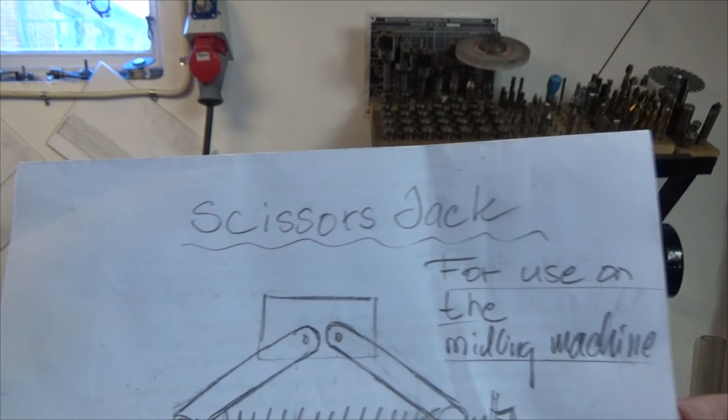Hi there. I got an idea when I made the two machinist jacks in the previous videos, and I thought, why not use a scissors jack for use on the milling machine? And that will be my new project.

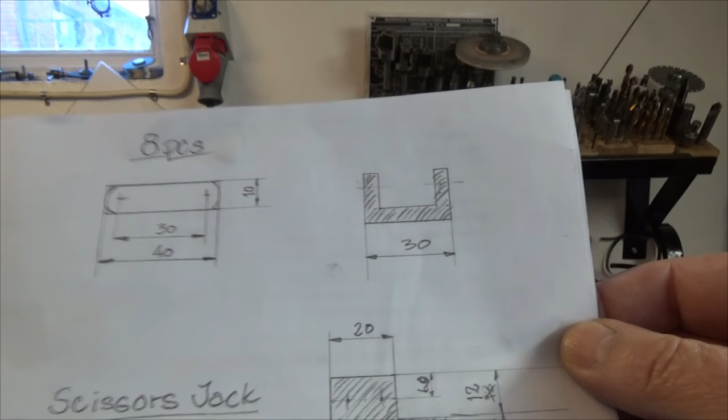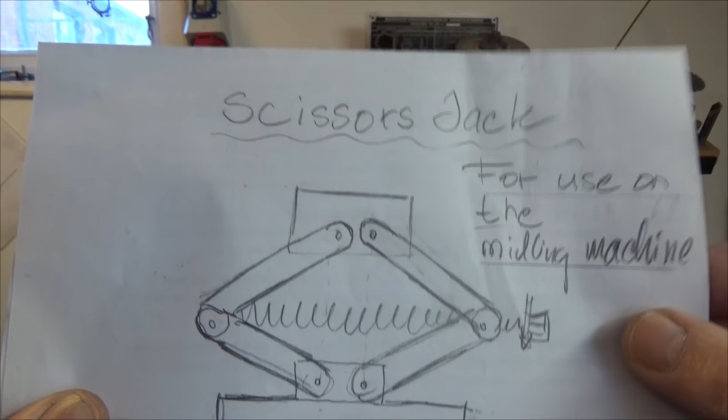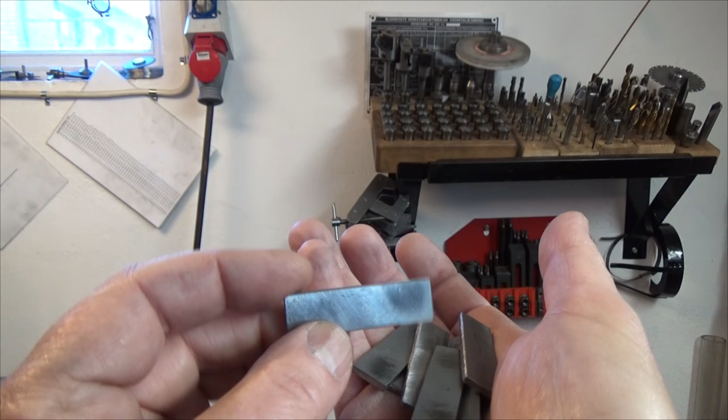I got some simple sketches here, and I will start with, I don't know what you call them, but this way, these arms for the jack. I will make them of steel plates, 3 millimeters thick, 40 millimeters long and 10 millimeters wide. So I start with this one and then we go on.

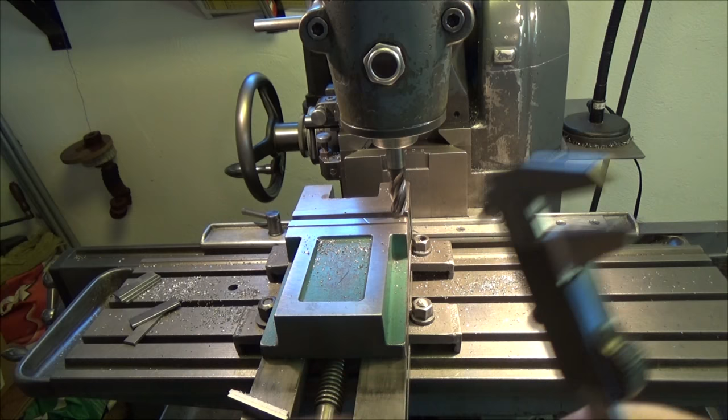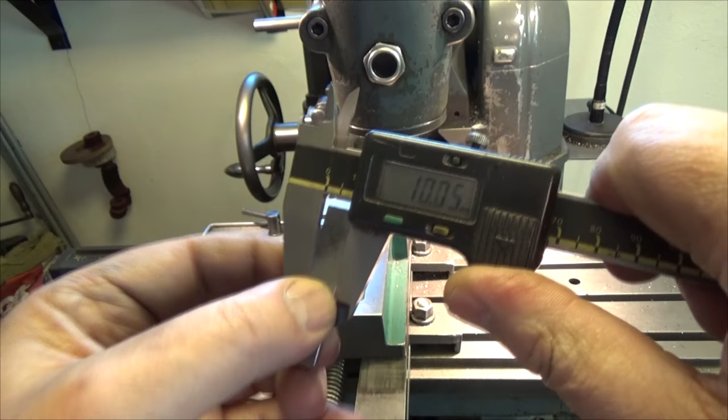Ten millimeters. 3 are done, and we got 5 more to do.

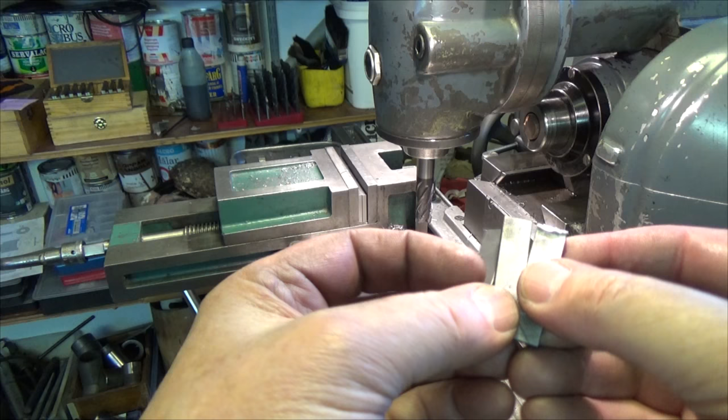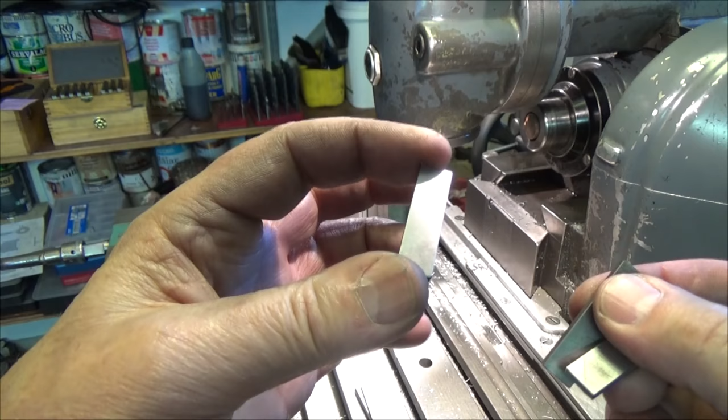So here are the first 3 ones. They have the correct length and width, 10 millimeter, 40 millimeter, and the next thing to do is to drill a hole here and a hole here.

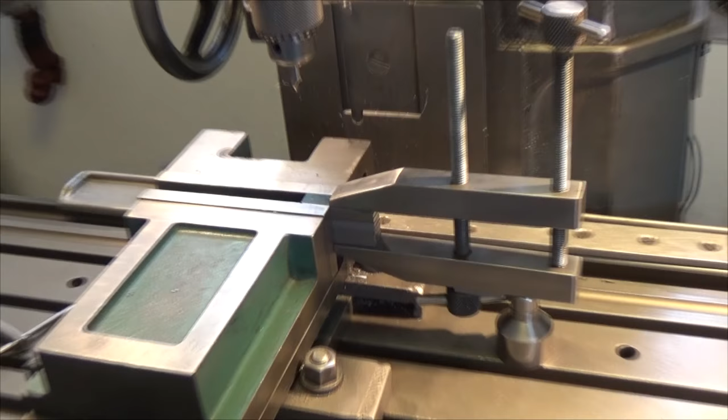Now it's time to drill these 2 holes, 5 millimeters diameter, and the setup looks like this. I'm gonna center drill this and then drill it with this 5 millimeter drill bit and do the same thing to the other side. Okay, let's go.

Okay, now it's time to drill a hole here, and I have, as you can see, screwed all the plates together with an M5 screw.

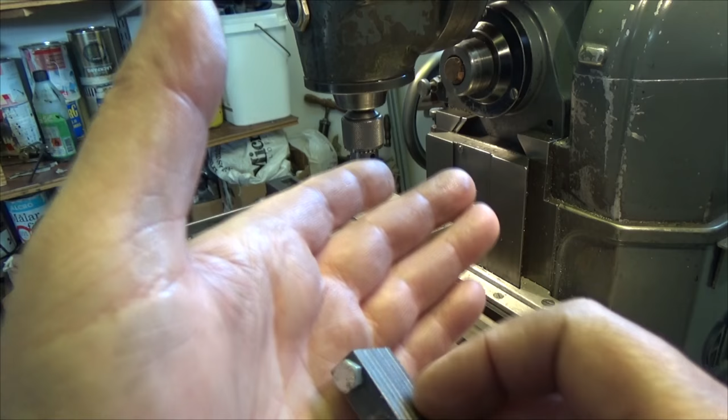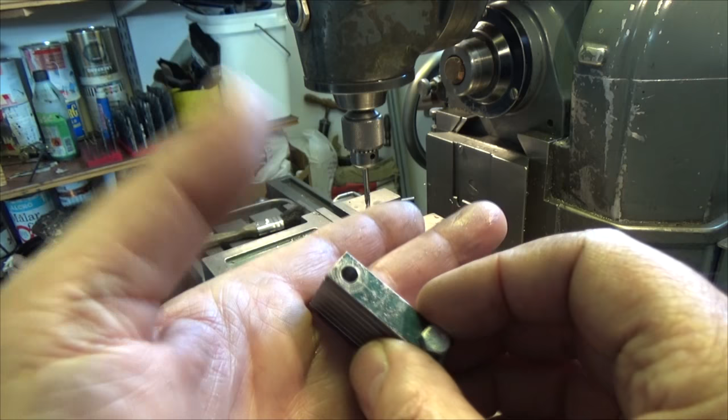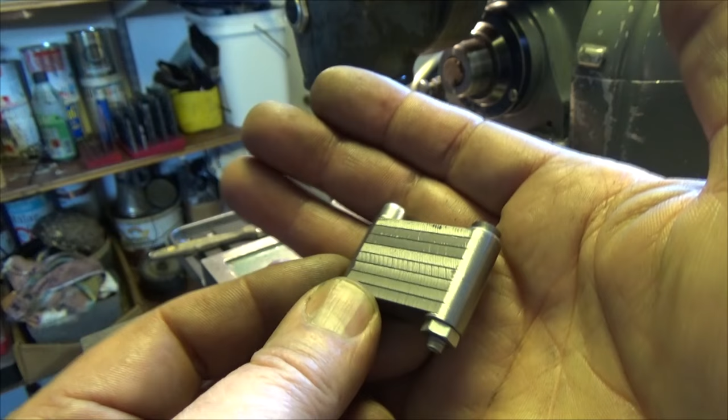Okay, here we have it. Next thing to do will be to round off these corners, and I think I do that on the grinder. That is the most easiest way to do it. And it looks like this after I have been doing some grinding work with it. No sharp corners.

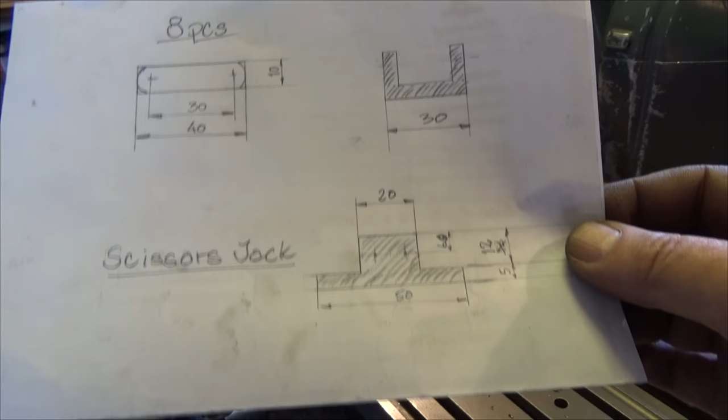Next thing to make will be this base for the scissors jack, and I will use this piece of aluminium and mill it to the right dimensions. I start with that. I will start with milling this surface flat, and then I will turn the workpiece around and mill the other side, so they both will be perpendicular.

We should be close to 30 millimeters now. Let's check. I think that is good enough. 30.09. That's okay.

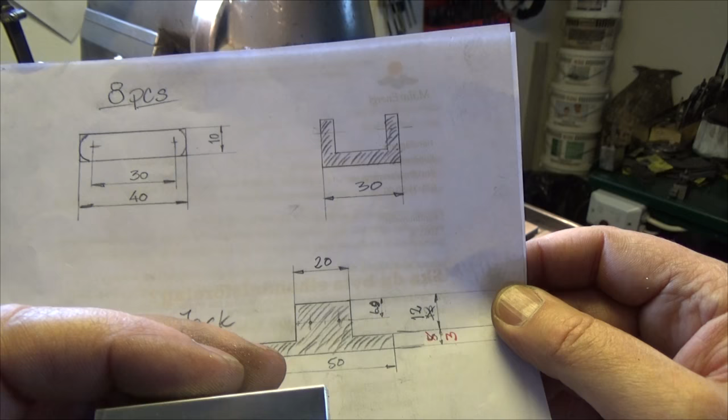Next thing to do will be to cut down, or mill, should I say, this down. And I have changed this to 3 millimeters instead of 5 because this isn't thick enough. It should have been 17 millimeter thick, but this is only 15 millimeters. But I think it will work out fine anyway.

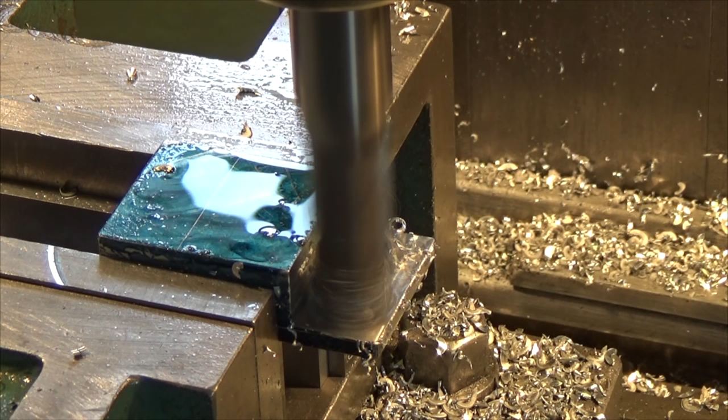Let's see what we got. Three millimeters thick, and how much is this? 14.94. Well, that's good. Then I do the same on this side.

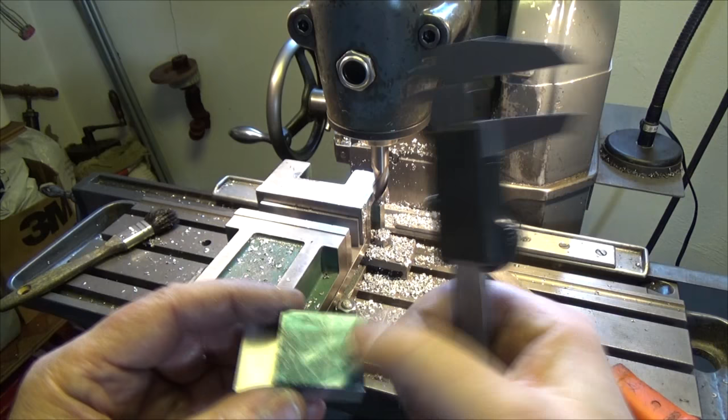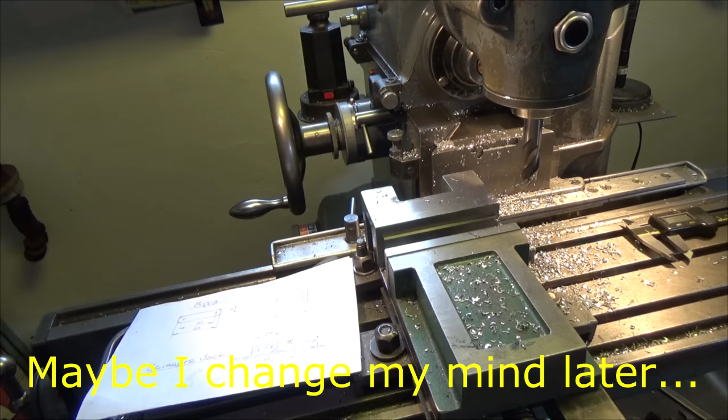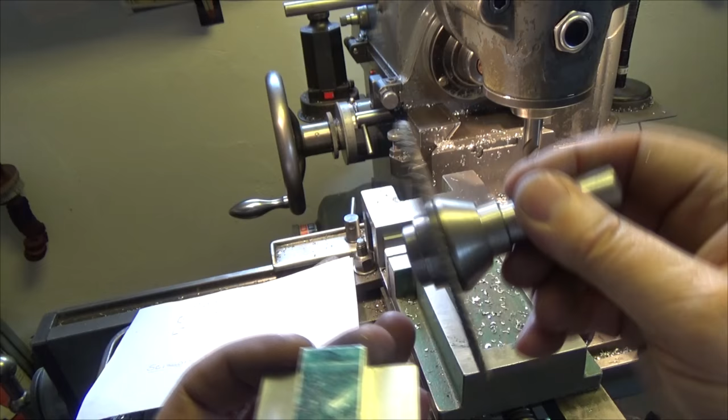I am not doing this according to my simple sketch here. I don't do this. I leave it like this, and I will now cut two slits here and here, and then drill a hole here and here for these arms. To cut these slits, I will be using this slitting saw, I think it's called, and cut this down to the plate surface, no more, no less.

That's okay. And it looks like this. And then I do another slit here, and I do that off camera. And here are the results. Two slits, and this arm goes in here just like this.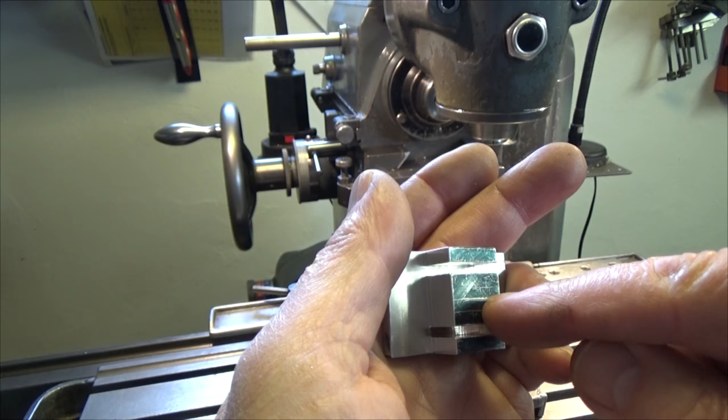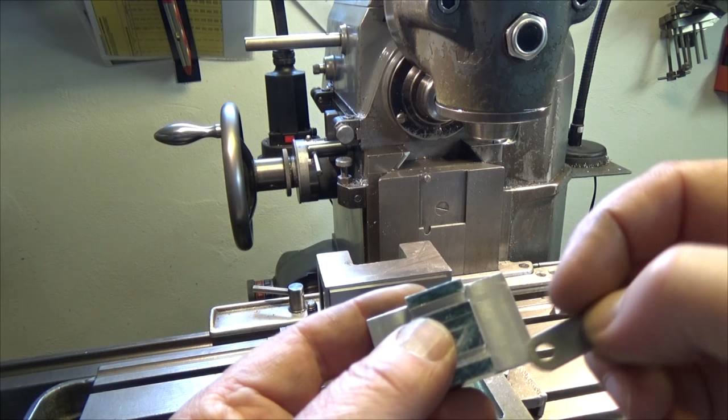Well, once again, change of plans. I will be milling out the center of this block, about 7-8 millimeters wide, and then I will be drilling holes right through here and here. And then I will be making some kind of sprints to lock these arms with. Well, anyway, you see it in the video how it turns out.

Time to center drill and then drill with this 5mm drill bit. Here we go. One done and one more to go.

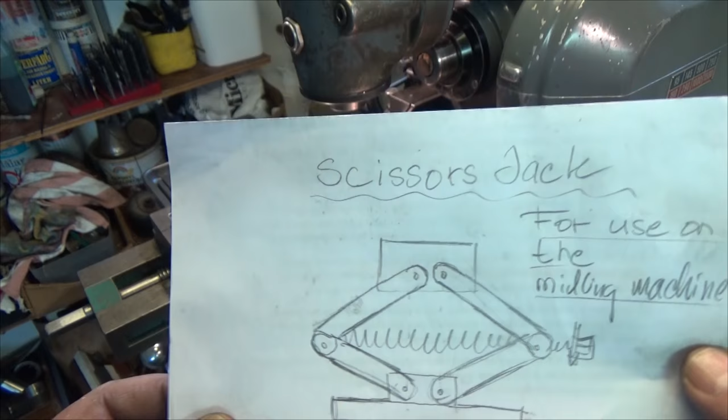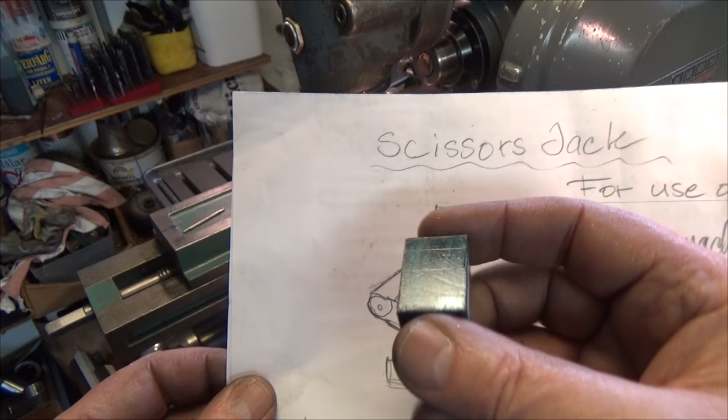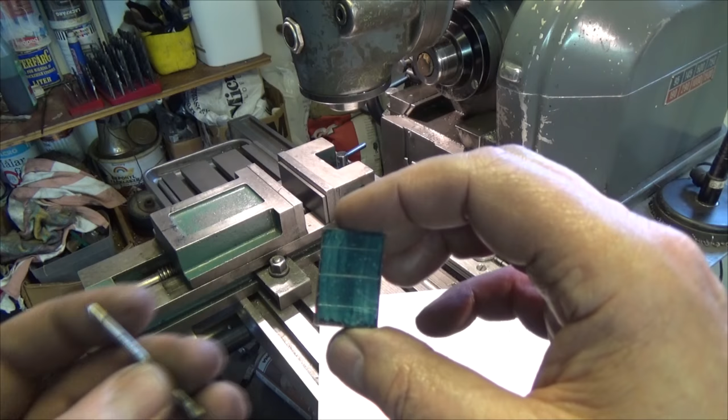Now we have come to the next part in this project, and that is to make this upper part of this scissor jack. For this I'm going to use this piece of aluminium, and then I will mill the slits as you see here. But this time I will not use a slitting saw. Instead I will use an end mill, 3mm. I think it's a little bit more exciting.